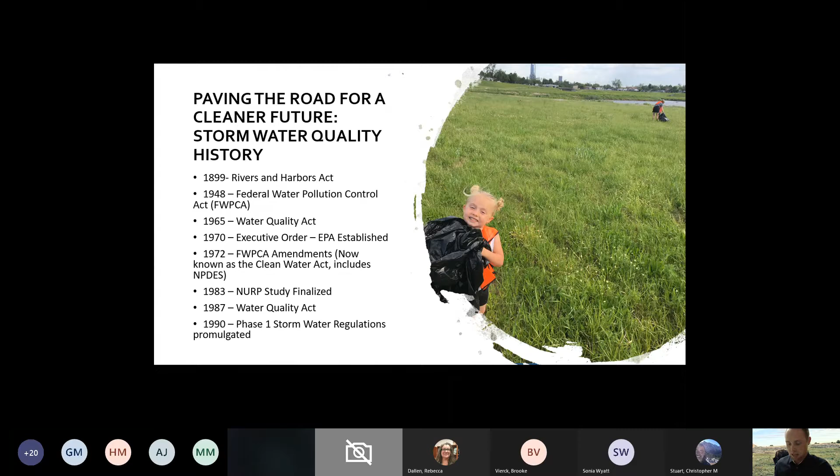Continuing on, Oklahoma City was first permitted with EPA in 1995, so we've been a permitted municipality for over 26 years now. In 1997, EPA, which originally had the responsibility over permitting, eventually delegated that authority over to ODEQ.

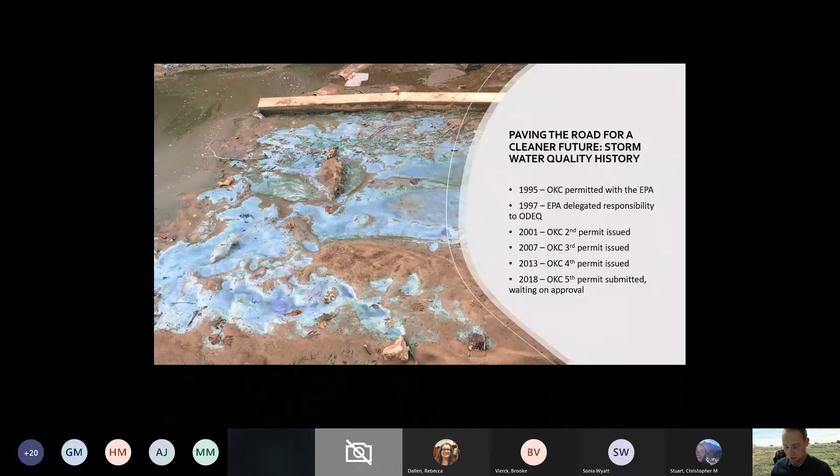And of course, 2001, 2007, 2013 - that's when our other permits were issued out to us. Our fifth permit was submitted in 2018; however, we're still waiting on approval.

As I stated, in 1997 ODEQ received the authority from US EPA to administer the federal National Pollutant Discharge Elimination System for state permits, federal sites, and pretreatment and biosolids programs. They adopted the federal regulations, so our permit is really called the Oklahoma Pollutant Discharge Elimination System.

As you can see, I've got some quoted material in there. It basically says co-permittees are hereby authorized to discharge stormwater from the municipal separate storm sewer system. Then a little farther down in the permit, it states: in accordance with effluent limitations, monitoring requirements, and other conditions set forth in all these parts within the permit.

In the permit, it starts stating our goals. And of course, right there in our discharge goals, we're trying to have no discharge of floatable debris, oil, scums, foam, or grease in other than trace amounts.

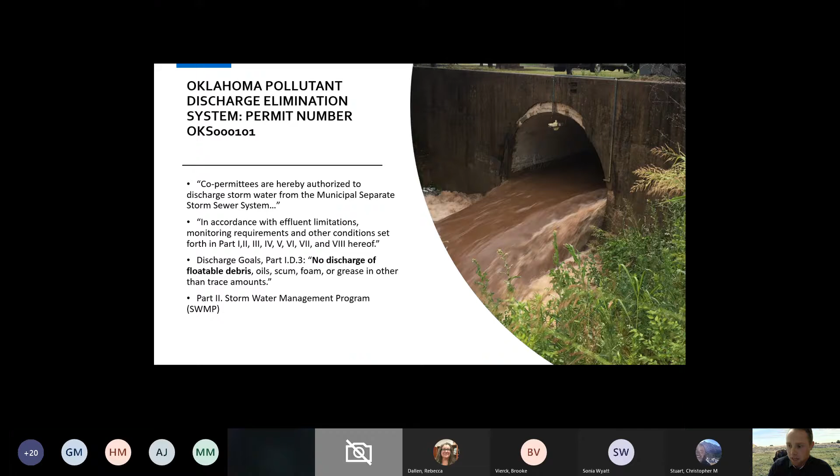Within that permit, we also have our stormwater management program. This program tells us all of the components we have set aside to limit these pollutants. The stormwater management program states that we shall include controls necessary to effectively prohibit the discharge of non-stormwater into municipal separate storm sewers and reduce the discharge of pollutants from the MS4 to the maximum extent practicable.

So this permit is why we're directly involved with controlling floatable debris. And as you can see, we've got 15 components within our stormwater management program.

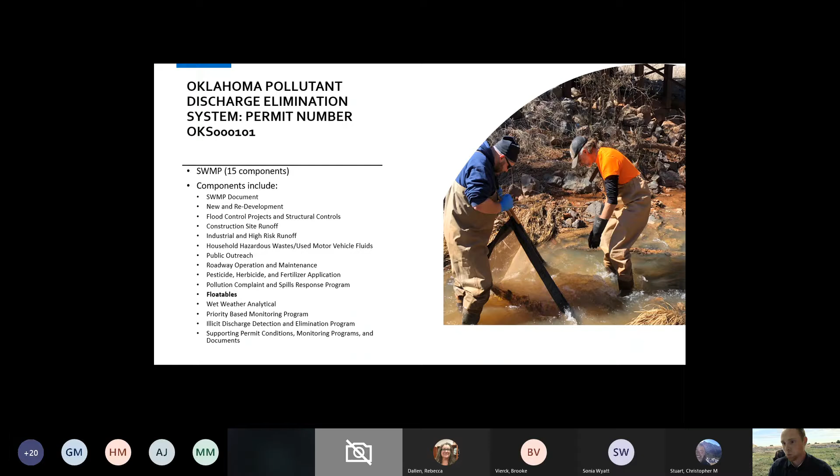As you read, it goes down into new redevelopment, flood control projects, construction site runoff, and then a little bit further down we have floatables. So that's one of our main components within our permit that we have to take care of.

Just going into basically our stormwater quality division and everyone that's pretty much within it. We've got 6 sections: administrative, construction, environmental, household hazardous waste collection facility, the industrial, and the outreach section.

On this slide, I'm basically just letting you guys know that we don't just have floatable debris monitoring, but we also have other programs that we're primarily in charge with. So of course, you can see right there, we've got wet weather analytical monitoring, priority watershed based monitoring, which ended with our last permit. We're kind of waiting for our new permit to come through. The illicit discharge detection and elimination program, total maximum daily load monitoring, trend and load based monitoring.

And this is really going to be our new water monitoring program once the new permit is established. We also conduct bacteria monitoring along the Oklahoma River. We also have the adult mosquito surveillance and larvicide application program, storm drain curb marking, floatable debris monitoring, and then we're also assigned special projects such as BMP installation and monitoring.

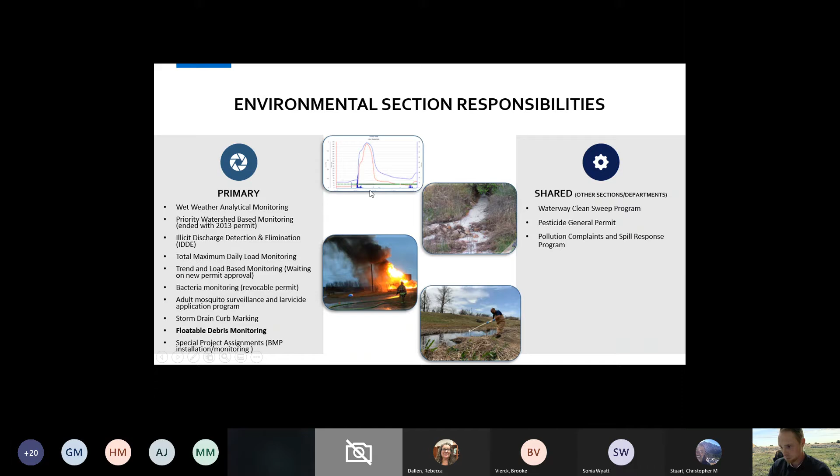So for floatable materials, really, there's so many definitions out there that people have. This definition states floatable materials is defined as any foreign matter that may float or remain suspended in the water column. I believe New York states that floatables is just man-made materials. And of course, depending on your definition, it can be composed of natural or man-made materials. The picture to the far right that you can see, it's just a mix of everything there is right there.

So according to this definition, not all floatable materials is trash. Sometimes we can deal with trees that's basically been eroded from the side of a stream, a 60-foot walnut tree or something that was washed out. And then of course we also can deal with like fridges or cars, mattresses, you name it, coming down the creek and getting stuck into our debris barriers or wherever.

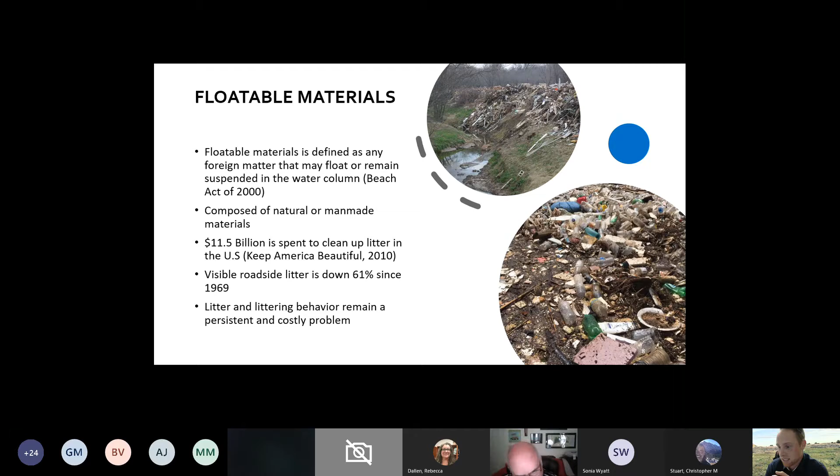And of course, visible roadside litter is down 61% since 1969. However, litter and littering behavior still remains a persistent and costly problem.

All right, so where is it all coming from? Illegal dumping and littering. And of course, depending on your definition of what floatable materials is, sometimes you can have just people throwing out grass clippings, tree limbs, all kinds of stuff, and it'll get into the waterways and float down. Next thing you know, it can even get caught up in our storm drains, blocking any water going through it, and then we have flooding in our streets.

We also get people that will dump pet waste. Also have had people that dumped their horse waste and stuff off the side, and so you'll have that floating down the stream with all the straw and all that kind of stuff.

The stormwater discharges, that's pretty much just rainwater that's pushing any trash down the curb lines and going into our stormwater sewer overflows. You're going to get toilet paper and all kinds of stuff that people's flushed down, some kid's little toy or something that they've been missing, or who knows.

Homeless encampments, we see a lot of our trash coming from homeless encampments. And of course, you can call it in, and then they just move from site to site. So that's a problem that's really hard to get a grasp of.

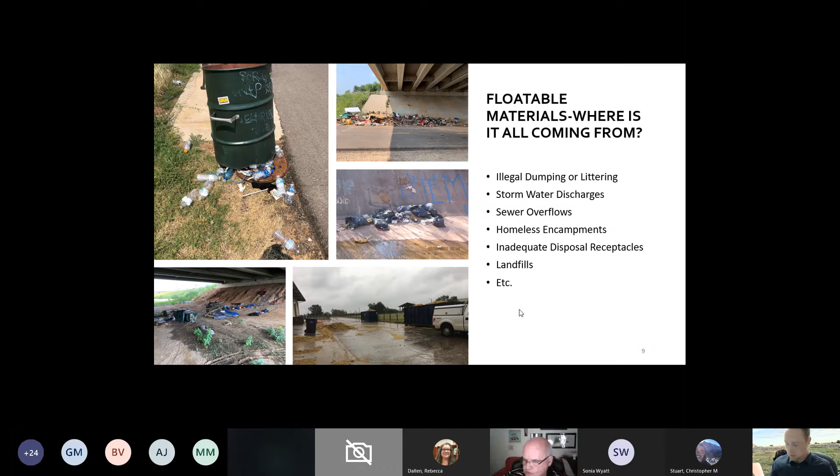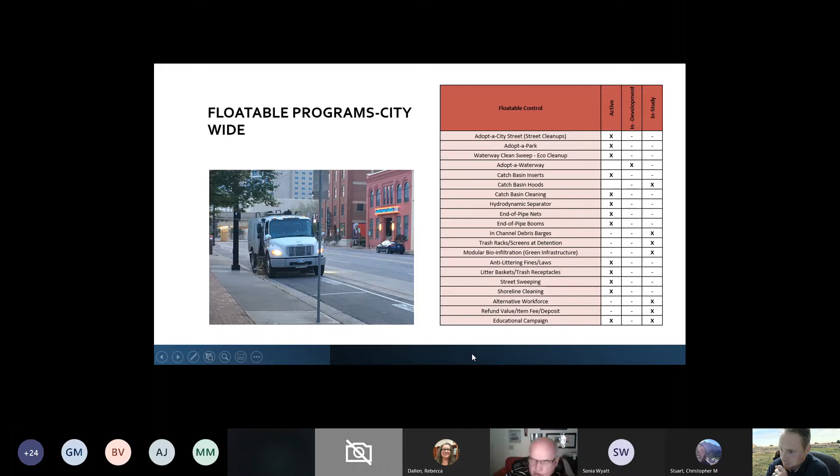that also begs to differ. It's really street sweeping. You're not getting 35,000 tons of just trash. They're picking up sediment, they're picking up all kinds of stuff, but they are picking up trash.

However, it's not a bad thing that they're picking up sediment, rocks, gravel, stuff like that, because sediment is still considered a pollutant that can have long-term impacts on aquatic life and other wildlife.

And we also have even TMDLs that are under basically the sediment and turbidity pollutant, basically. So like there's some of our total maximum daily loads, for Lake Thunderbird anyways, they're under the sediment and the turbidity pollutant.

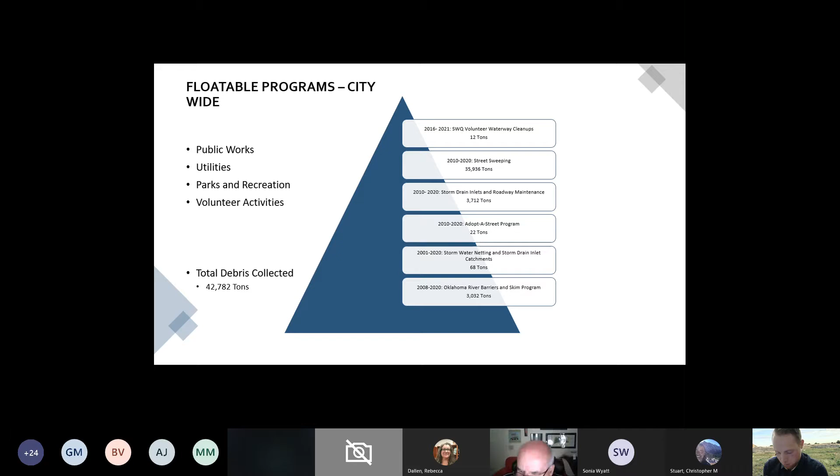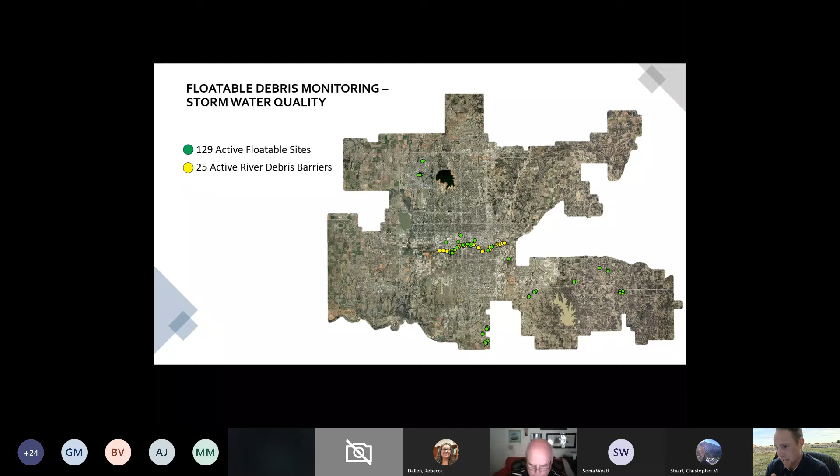All right, so here I'm basically showing a map of all of our floatable debris sites that we pretty much have in the city. So we've got 129 active floatable sites, and then we've got 25 active river debris barrier sites.

So primarily our floatable sites consist of storm drain inserts, stretch nets, and ring nets. As you can see, there are nets.

Pretty much, they're not just collecting just trash, but they're collecting leaves, natural materials, sticks. I mean, everything that's pretty much floating down the creek or down the curb, wherever. And if it gets caught up in there, it's going to get caught. So sometimes we found fence panels, like complete fence panels stuck in these nets. We found mattresses. I mean, we've also had, of course, dead animals that get caught up in there, moles, snakes. I mean, you name it.

The nets can really get easily ripped if there's too much debris, they'll break or snap. And then, if we have homeless camps nearby, they tend to steal our nets, and who knows what they use them for.

The stretch nets, they probably tend to use for some kind of a hammock or something, which would be pretty nice.

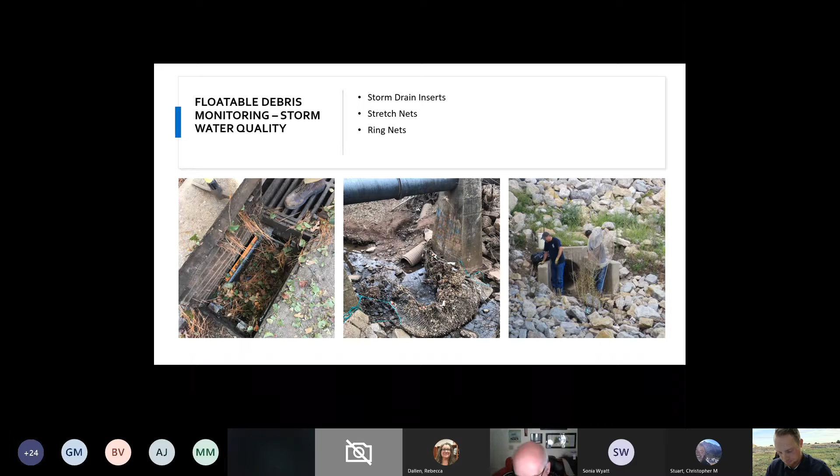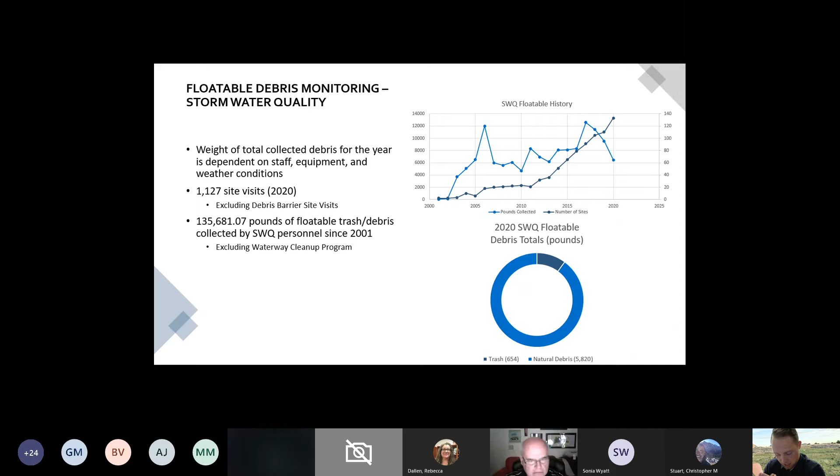We're not able to classify every piece of trash. For example, something we've seen increase just since 2020 is face masks - something I've never actually seen in any of our nets since I started. But in 2020 we're pretty much getting face masks in most of our net collections, which will be interesting to see over the next couple of years, how many face masks we tend to pull out of these nets.

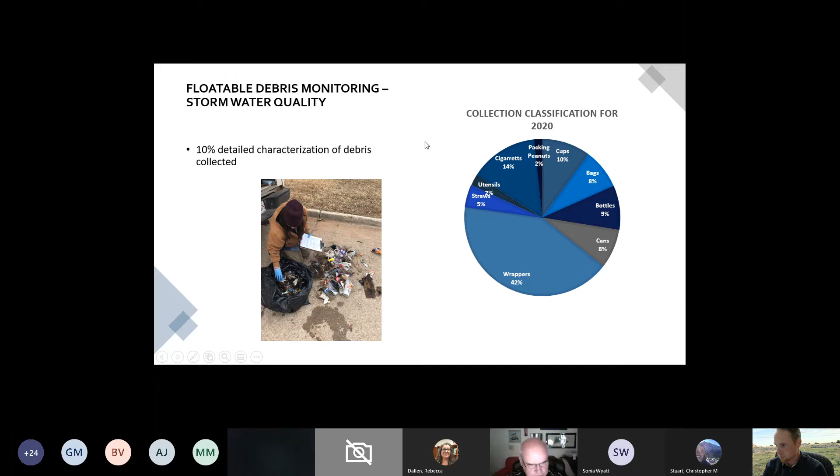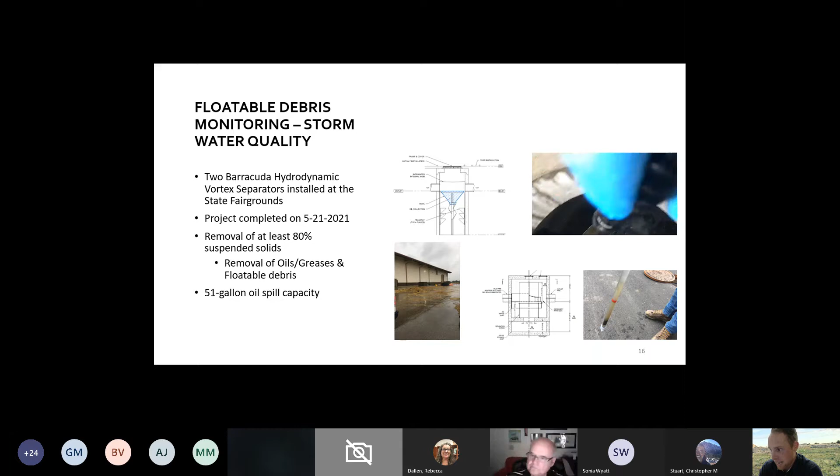These hydrodynamic separators are really getting a lot of the runoff that's primarily near the horse stalls. As you can see on the screen, there's a lot of hay and stuff that's gotten close to topping over, but it looks like it hasn't quite made it over that screen. Like I said, we just installed these, so we're still figuring out how well they actually work with collecting floatable debris.

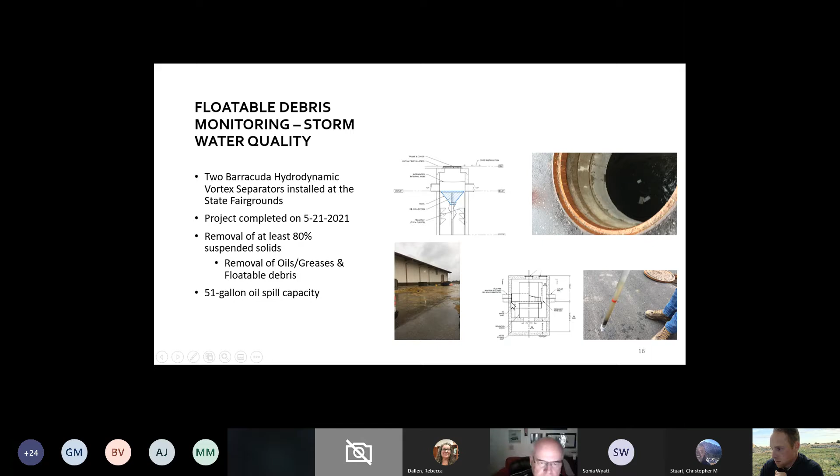The next thing I'd like to talk about is our Lightning Creek Watershed Floatables pilot study project. This is a pretty interesting pilot study, and it's really going to be the framework which Oklahoma City will use to identify sub-watersheds that contribute elevated levels of floatable debris.

Basically what we did was go through and first develop windshield survey techniques. Then we needed to identify sub-watersheds contributing the most floatable materials and identify sub-watershed infrastructure characteristics, basically looking at manholes or outfalls, whatever's nearby. Then we identified the best available structural BMP placement. For this watershed, we were really looking at hydrodynamic separator placement, and then of course we put together a cost associated with this project implementation.

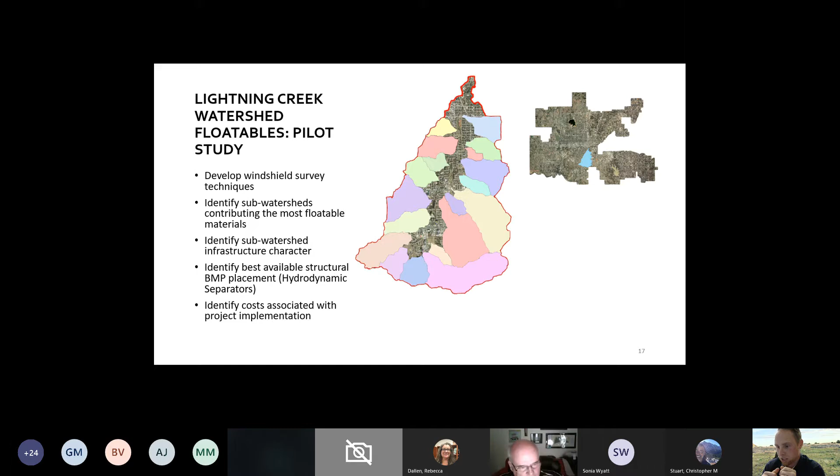We went through and started ranking the trash level along the streets and curb lines, ranking them as high, medium, and low. Low would be like 3 to 5 pieces of floatable trash in the curb lines, medium was 5 to 10, and high was greater than 10 pieces of trash. After that was done, we basically ranked the sub-basin as a whole as either high, medium, or low.

Once we did that, we assessed the pre-selected storm sewers where we wanted to put the BMPs. The storm sewers were selected in the lowest portion of each sub-basin based on the watershed characteristics or the GIS infrastructure information. We also took several notes and measurements to help determine the suitability for the selected BMP, and they were also ranked on ease of access - how easy it would be to open up these storm sewer lids and get a contractor in to clean out these separators.

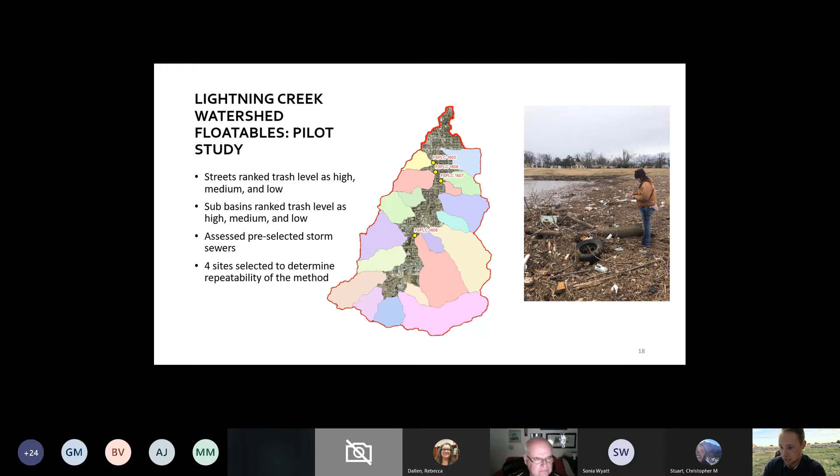As we selected those sites, they didn't go as well as planned. There were some homeless camps nearby and they started stealing all of our nets. We put them out there several times, went back the next day, and they were gone. Our nets would also completely rip from large debris - this was just after the big ice storm, so people were cutting logs and trees and throwing them into the drainage. As any rainfall came, you would get half a tree in one of those nets and they would be completely ripped up.

Also, we kind of realized that we were putting some of these sites way past our BMP location, where we wanted to put our hydrodynamic separator. So we realized most of these leaves and trees could be coming from below our BMP location. We really needed to put these nets, or some kind of net or inlet, above these BMPs to actually determine the correct method.

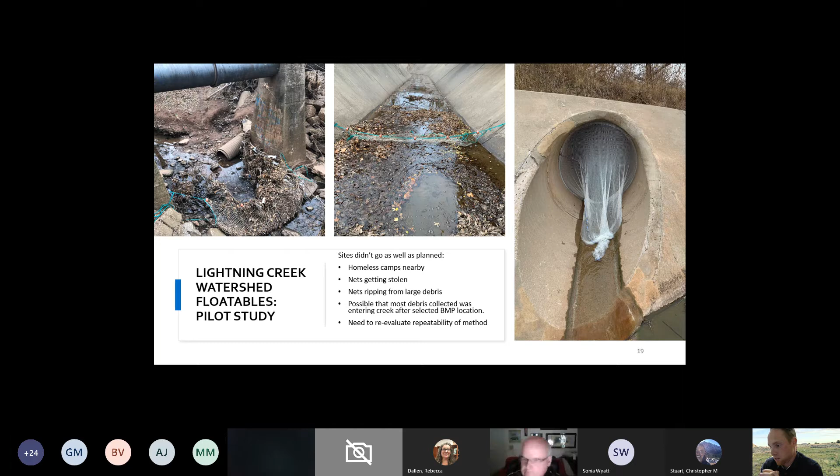So next step, we needed to reevaluate the repeatability of the method. Our next moves are primarily going to be trying to hire a part-time employee to work on the project full-time. This is going to be a project that's going to dedicate a lot of time, and we just have too many projects that we're dealing with. So I really want to end up hiring someone part-time to work on this full-time.

Once we get a part-time person hired, we're basically going to monitor the areas above the determined BMP site, and distinguish where the floatable trash is really entering the storm sewer. We're going to determine the number of inlets per acre in the subbasin, figure out the percent of watershed that actually enters those inlets, and then randomly choose which inlets we want to monitor.

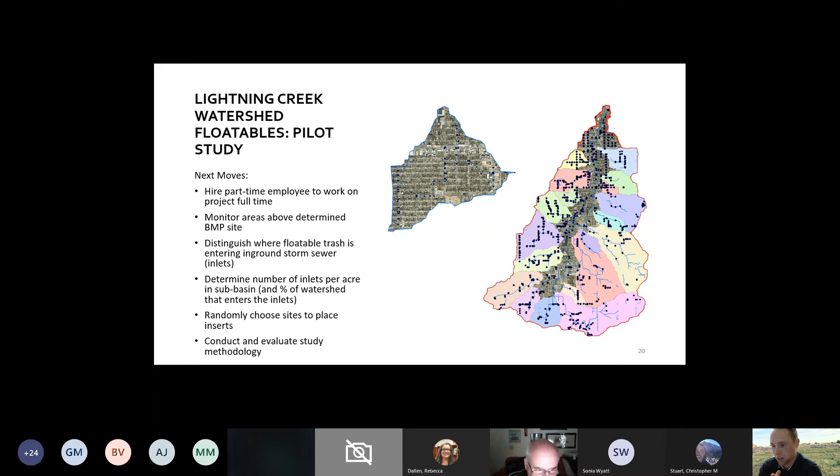Once we put those inlets in and start monitoring, we're going to evaluate our methodology and see if it actually comes up with the same results as our windshield survey methodology. It's a pretty interesting pilot study, but once we tweak everything out, it'll be pretty interesting because, like I said earlier, this is going to be the framework for going through and looking at all of our other watersheds within the city that contribute most trash to our waterways.

We also deal with the waterway clean sweep, which Brooke typically goes over towards the end, and I don't want to steal too much of her thunder, so I'll just go through this real quick.

What's awesome about this waterway clean sweep is that it's primarily picking up trash, just straight trash. We're not picking up trees, we're not picking up logs or sediment. This is primarily 99% trash that we're finding that's just been littered, thrown out, you name it.

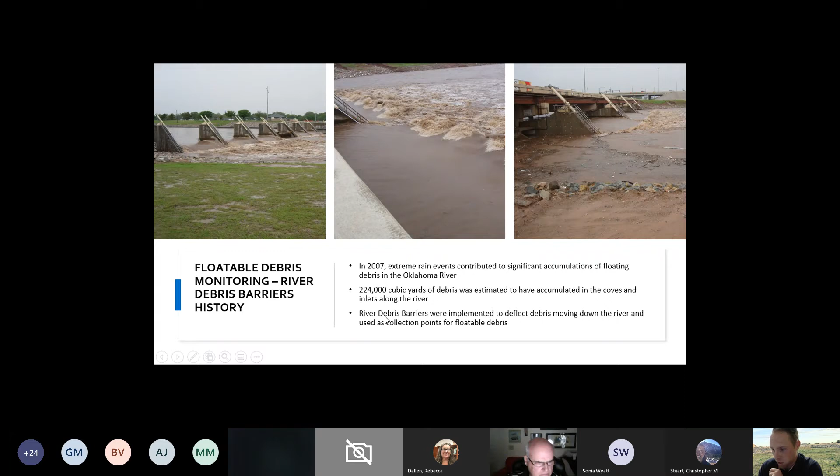So this is where our river debris barriers really got started. And as you can see, this I literally just went out and took pictures of.

Trash will pile up along the riprap. You'll see it just in the waterways, eddies. And then of course we have sewer lines, so they'll pretty much be blocking a lot of this trash, but it is unreal the amount of trash that will come down from these watersheds. And these river debris barriers, they're one of our best defenses to keeping this trash from going downriver.

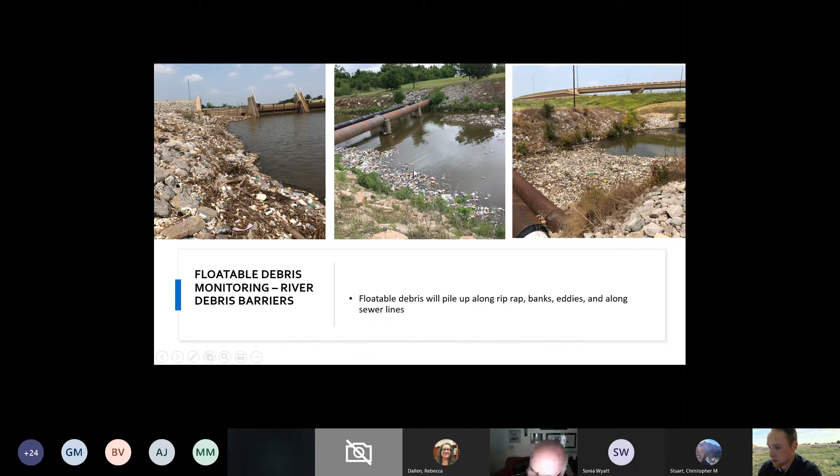And this is where the Oklahoma River Maintenance Crew comes into play. We pretty much have a collaborative effort between stormwater quality, the environmental section, and the Oklahoma River Maintenance Crew. My section is primarily responsible for the maintenance of the booms, making sure they're tied up and not floating all over the place. We're responsible for also purchasing new booms whenever old ones need to be retired. And the Oklahoma River Maintenance Crew, they're responsible for keeping the channel clear of debris.

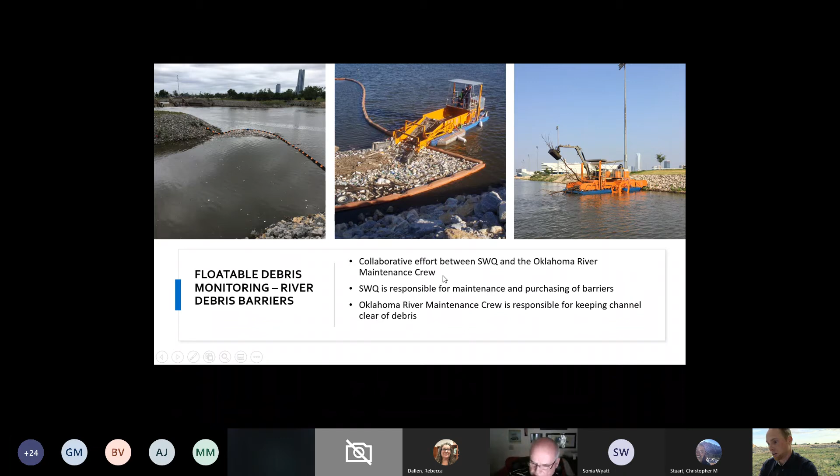However, that's not just their only responsibility, just like how floatables isn't just our only responsibility.

And of course, heavy rain events will detach our barriers. Our barriers are just held in by anchor plates. Eventually, we'd like to upgrade into something more stable, to where they can hold a little bit more weight, so the river debris barriers won't just pull off.

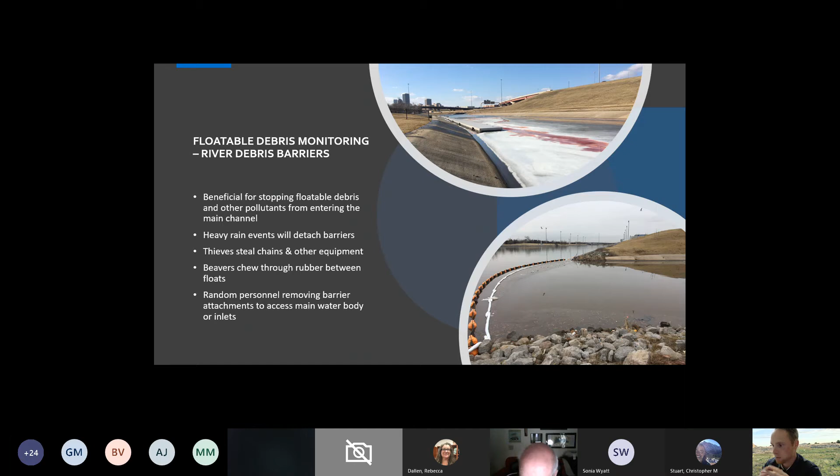We also deal with people stealing our chains, stealing our equipment, you name it. We've had beavers chew through the rubber between the floats, and then we'll go through there and repair it. We've also had random personnel that will remove our barrier attachments to really access the main body or the inlets. This is primarily with people who have boat ramps or something in the inlets, and they can't get out, so they'll end up tying a string or something onto our barrier. Next thing we know, we'll find it all wrapped up on the side after a storm event that's come through.

Some really big changes that most people don't know about - the Oklahoma River Maintenance Crew were really under the Streets, Traffic and Drainage Maintenance division, so they had other priorities they were responsible for. They weren't really dedicated 100% to the Oklahoma River, but they would come back and go out there and clear out the debris when necessary. But there are big changes happening to where hopefully they will become their own division, and they'll be able to be on the river 24/7. I'm real excited to see the progress they're going to make with being able to be their own division. It's just an endless possibility, hopefully, of how far they can go with this.

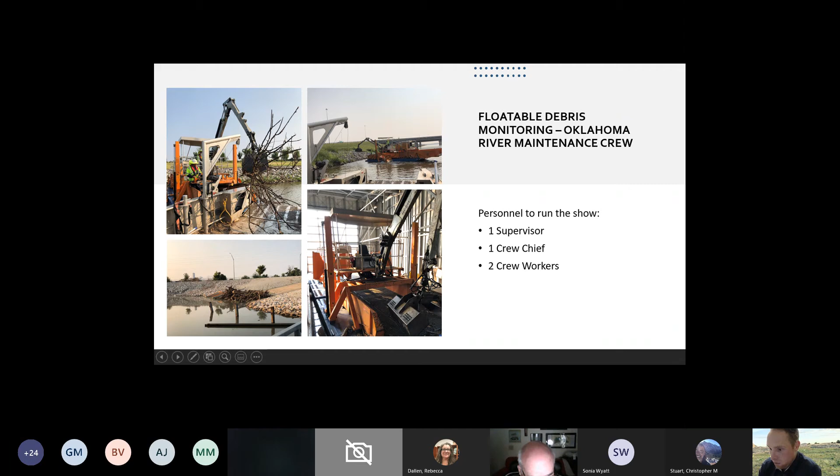Now, of course, their other priorities include keeping the dams operational. They keep the channel clear of debris. They're also taking care of dredging the channel, and they assist with other assignments. They've gone out and dealt with diesel and oil spills. And you'll typically always see them out there - they're always doing something out there.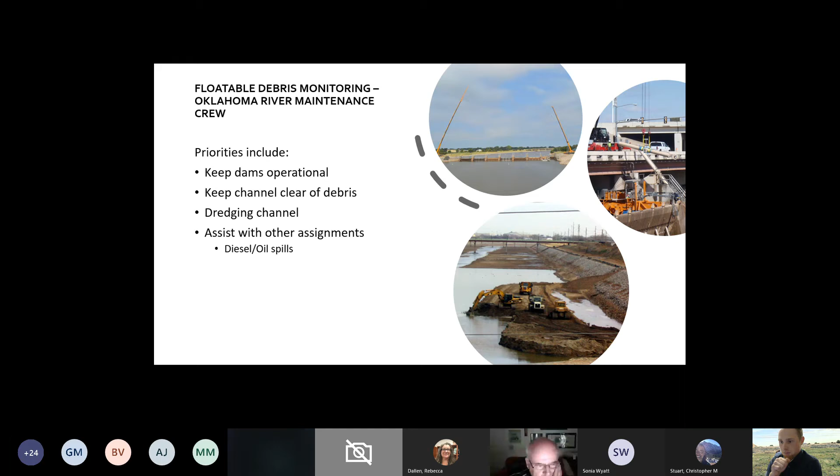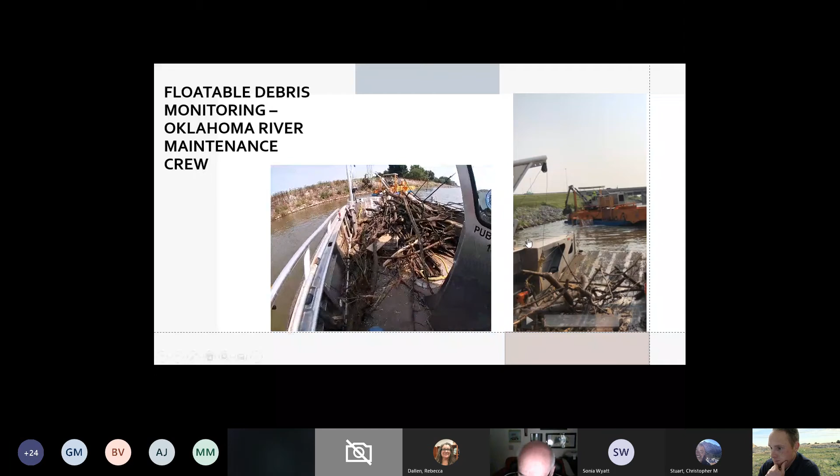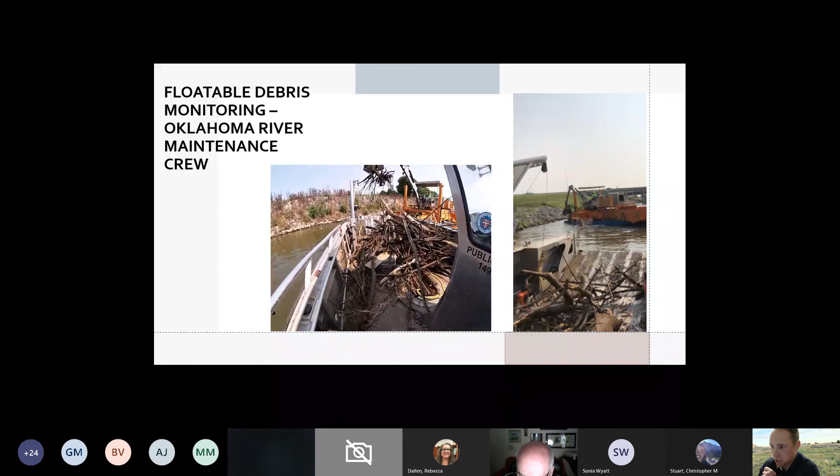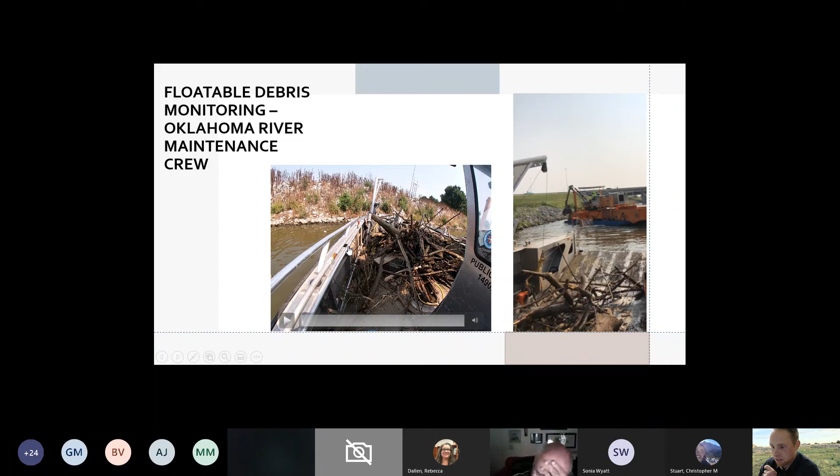Here's a couple of videos I took just to show you how they're pulling material out of the channel with their skimmer boats. Basically, they have to put most of this material in another boat because their skimmer boat really doesn't have enough room to carry all that debris, which you can see in some of the pictures that I have - they've already got some debris under in that skimmer boat. And these boats, they're real... just that.

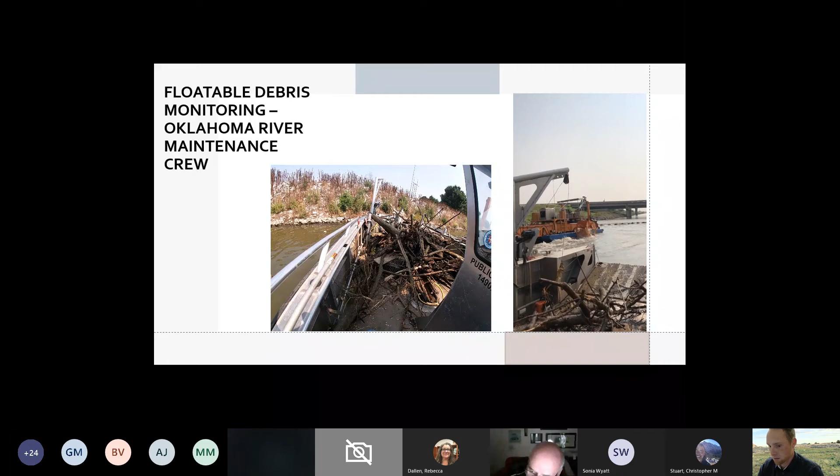All right, so on here, pretty much this is the river maintenance floatable debris history. You can see, I mean, we are the small guys on the totem pole. They pretty much out collect us. I mean, it's unreal how much debris they can collect with their equipment.

So since 2008, we collected 60 tons, and they've collected 3,000 tons, just clearing out the river channel. I mean, the river crew is needed so much on the river. We barely put a dent into what they can actually get accomplished in one day.

Really, I think we was talking about it, and they can almost get around 2 tons a day. So within a couple weeks, they're already pushing past what we can get done in several years.

Tons collected by division in 2020: last year we collected 3.2 tons, and they collected 109 tons. So like I said, they're the big dogs, and we're just the little guys catching a ride. We're just there watching them pretty much, but they really have an awesome impact on the river, and without them, there's no telling what the river would look like.

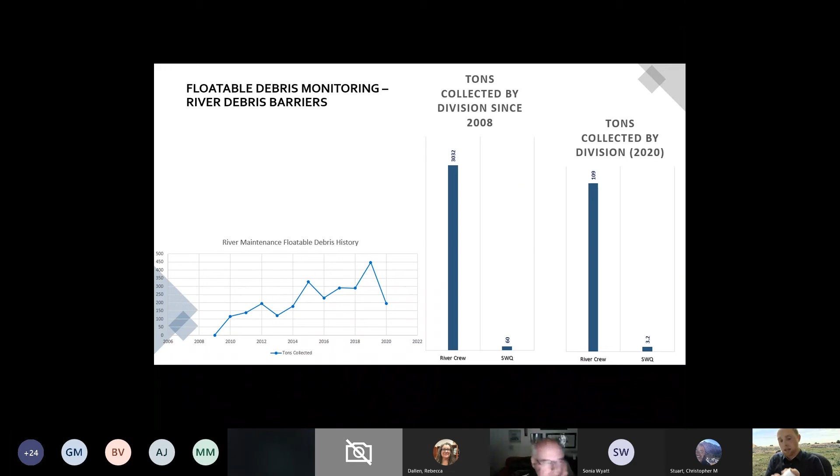So really what I learned just from spending the morning with them is, like I said, they're a great crew. They really want to take care of this river channel. The services they provide are imperative to controlling the floatable debris along the Oklahoma River.

And as I was there, you have people coming up to them asking, hey, do you mind trying to take care of this on the river? Or do you mind trying to get this? Especially the Riversport Adventures, they really depend on them to clear those waterways.

And there's all kinds of activities that occur within that stretch of river. They've got the holiday boat parade, the Bricktown Nationals drag boat races. And everyone knows we're the rowing venue, now home to the Olympic and Paralympic training facilities. In 2015 we hosted the Olympic trials. And of course we've got the Wheeler District Ferris wheel that's now along the river, and the Oklahoma River cruises going up and down the river.

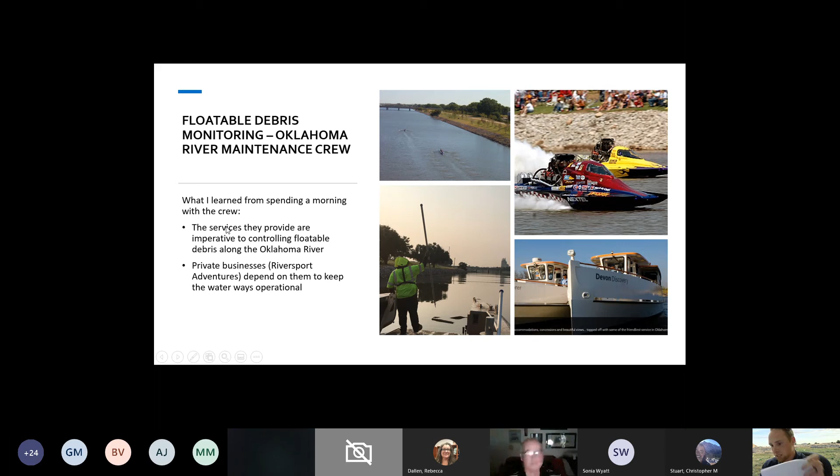And that's pretty much it. I did put a picture on there just showing everyone some of our new personnel here. We put our biggest guy in this little life jacket here, so that's why he's smiling.

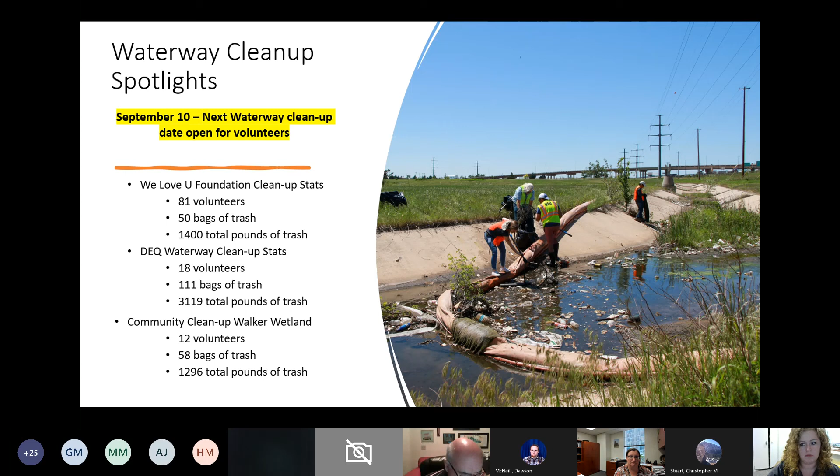These are some of our highlights for the year so far, with pounds collected from some of our previous Waterway cleanups. I'll end it short today—for any additional information, volunteer opportunities, or questions, feel free to reach out to me.